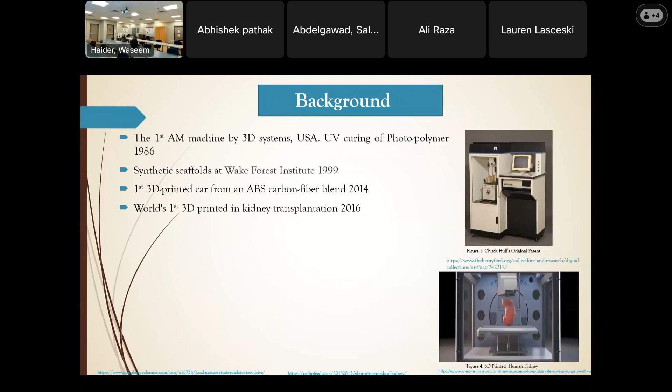But where exactly did it begin? It was actually in 1986 when Chuck Hull was given the patent for the first form of 3D printing, which was stereolithography. You can see the image on the right side. But it wasn't until 1999 that this technique was actually used for any practical purposes, and it was almost in 2014 when it was used for an engineering application where the first 3D printed car was made by blending ABS and carbon fiber by the company called Local Motors.

But what we're interested in is the huge development in 2016 when the first kidney, as I have shown in these two images on the bottom right, was actually 3D printed. Now, when I say 3D printed, 3D printing and additive manufacturing are just like synonyms. So that's what happened in 2016.

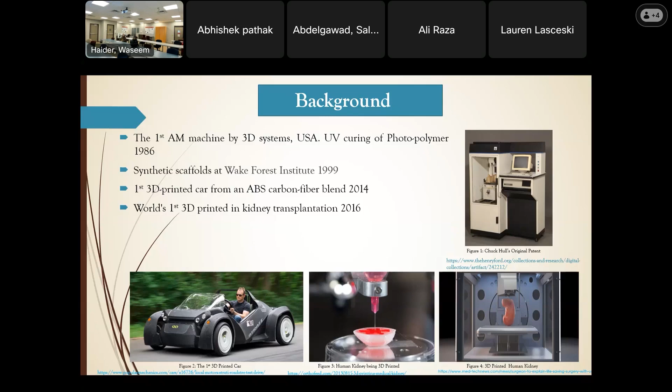And now, if we look into the engineering applications, we find that Bugatti became the first car manufacturer to use 3D printing as the method of manufacturing for the brake calipers for the world record holder car, the Chiron, as I've shown in the picture on the top right. Now, what's interesting about this car is that this brake caliper, these intricate designs and all these channels and sections and hollow areas that we see, all of this was possible by using 3D printing and the dimensional flexibility that we get from it.

And of course, we were using the hollow sections of titanium, as I mentioned here. And all of these things gave rise to unbelievable physical and mechanical properties, all of which were evident in the high-speed runs when they saw that the brake calipers as well as the rotors did not fade or fail, and were up to testing temperatures of 1200 degrees Fahrenheit.

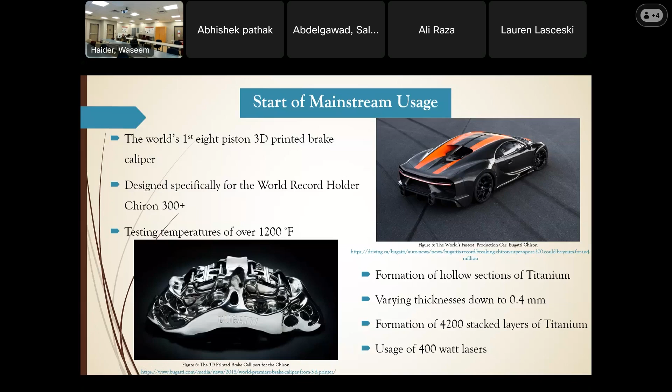These types of things led to the vehicle reaching high speeds of almost 500 kilometers per hour. This car is in the Guinness Book of World Records because of its dependence on the braking power provided by calipers made through 3D printing. So that's another example of how these technologies are affecting the engineering sector.

Some of you might already be aware of this technology, and some of you might be new to it. So let's run swiftly through the idea.

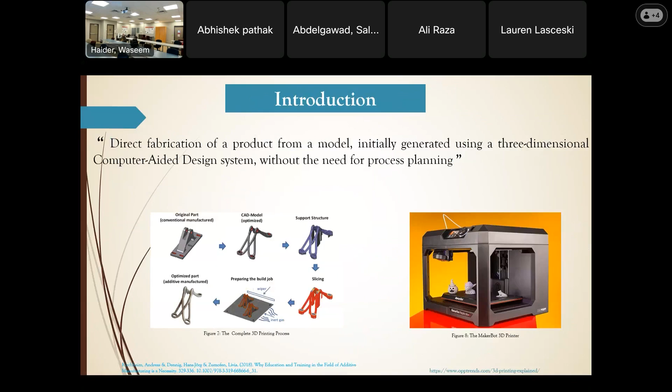Simply put, it's a direct fabrication mechanism in which we make a 3D model, a CAD model, through a computer of whatever part we need to print. That model is then supplied to a computer connected to the actual 3D printer, which has high-speed lasers in it. I'll explain the whole process in the next slides.

To summarize, the high-speed laser starts to melt the uniform layer of powder deposited on the build platform. Once that initial layer is melted and solidified, the laser beam moves slightly overhead and builds the second layer, then the third, then the fourth, all the way up until the final part has been built.

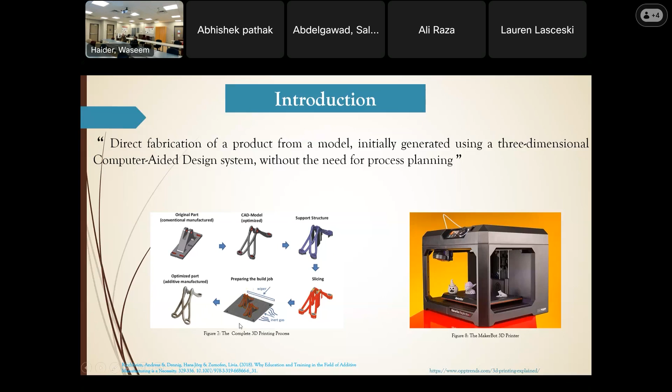The build can be vertical or horizontal, but let's go deeper into the actual process. The first thing we need is a 3D model through a CAD modeling system. There are different types of modeling mechanisms, and two types I want to discuss here, and why we need the latter.

We have the solid model and the polygon model. With a polygon model, we can have walls of zero thickness as well. This type of modeling is very useful if we're looking for gaming graphics or gaming scenarios.

Once we have that - I've given an example of a pair of spectacles here - this is an example of the model that we need. We'll have to go to the previous slide, sir.

Once we're done with that, we need to convert that model into a format readable by the 3D printer itself, and that's when the conversion to STL comes into play.

STL is an abbreviation of stereolithography. Some people also call it standard triangle language. What it does is define the 3D model into a 3D shape with all the intricate details that might be present on the surface, details that may not have been visible in the initial model.

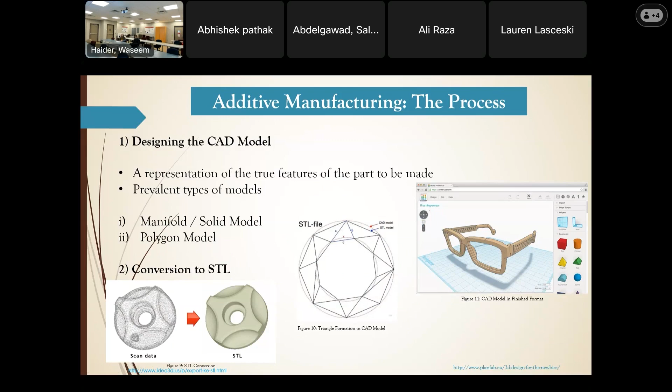The first step is that the build platform is covered with a uniform layer of the powder, covering the whole platform. Then when the laser fires up, it starts to melt that first layer of powder in accordance with the coordinates provided in the model.

Once the first layer has been molten, it starts to solidify, then the hopper containing the laser mechanism moves upwards by a certain dimension, and starts to deposit and melt another round of powder. It deposits the powder, melts the powder, moves upwards - it's a cyclic process, layer by layer, all the way up until the part is finished.

It could be a horizontal build or a vertical build, but most of the time people prefer a vertical build. Once you're done, you just remove the part. If you see this image on the extreme left, you can see these little edges between the notches of this part.

So these are called the supports. These little things are actually responsible for making sure that the part is standing upright onto the build platform. Obviously they're not part of the actual component, so you have to remove them. You see that in both of these next images right here.

Sometimes there's just standard support, sometimes they're dissolvable, so you just put them in a solution and they dissolve right away. Otherwise, you have to use mechanical methods like grinding and polishing, and you're good to go. That's the beauty of this process, because once you do 3D printing or additive manufacturing, you face little to no post-processing. Don't get me wrong, there is still some type of post-processing associated with the mechanism, but not as extensive as we have with casting, forging, welding, all these things.

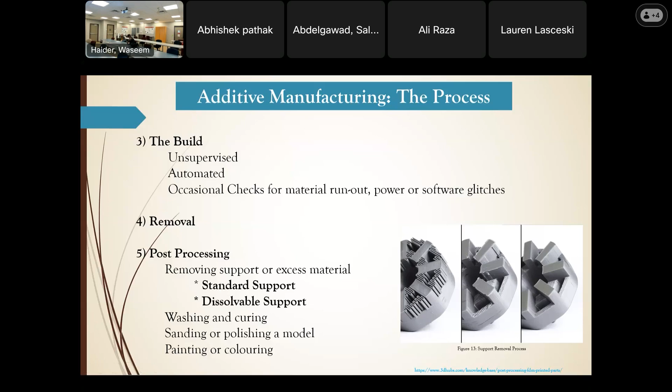This is where we gain an edge over other conventional techniques. We're talking about the benefits, right? So let's talk a little bit more about them. I've already talked about the shape tolerances, the dimensional flexibility, and the way we can just customize whatever we need.

Just imagine the type of intricate details you have on that brake caliper, you are literally amazed by this technology. It just goes to show how much flexibility we have and how far we've come from conventional techniques like casting or forging or all these other techniques. But we have all these customization techniques nowadays.

And of course, once we do that, we have little to no material loss because we're just making a simplified model and we have no other excessive parts associated with that.

Like, for example, let me talk about casting. I have a little bit of experience, like a year and a half in the casting industry back home. I promise you, every single day I used to see parts which had to be grinded just because they had excess metal coming out of the molds.

They had metal splatters all over the place. They had shrinkage, they had porosity. So all of these things, what are they? It's just material loss, right?

But this is something that you will never see when you're using additive manufacturing. Mind you, there are some defects. I'm not just going to talk about all is well and you're in a utopia. You're not. Obviously, there are some defects associated with everything. And yes, there are defects associated with additive manufacturing as well, but now is not the time to talk about it.

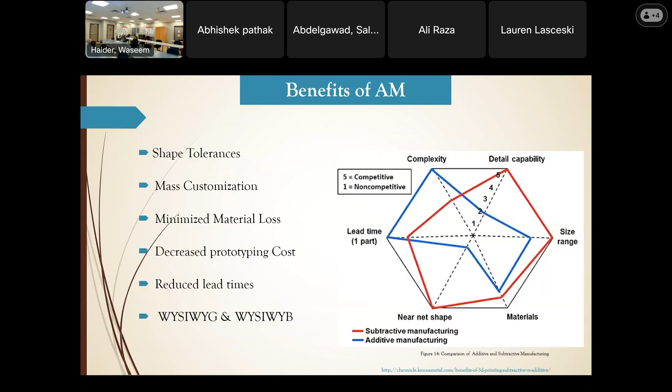So enough of 3D printing, we're just going to move slowly into the second part, and that is machine learning. Now, this is a hot topic for the past couple of years, so I honestly don't think I need to explain this to anybody, but let's just look into how people have been explaining it in the past.

The simplest words are people talk about automating the automation so that the computers just do the work by themselves. And believe it or not, this is something we have been doing pretty much all our lives.

I'll give you one example. You just feel like listening to some music, so you go to YouTube and listen to, let's say, some trance music. You search for a track and listen to it, then close the whole thing and it goes away. The next time you open YouTube, what do you see? There's a new trance track in your suggested tracks.

So what is it? Little did we know that this was just another form of machine learning we never paid attention to. This is just one example. And of course, we have the machine learning we see when we type anything on Google, and before we even finish the words, they're actually finished for us. This is also a type of machine learning.

But for people who have little to no experience with machine learning, let me break it down. It's more like gardening, where you are the actual gardener. What you do is plant the seeds, which in this case are algorithms. Once you've planted the seeds, you supply the data to the algorithms, which we can talk of like nutrients or fertilizers. So you supply the data to the algorithms, and in return you get plants, which in this case would be the program itself.

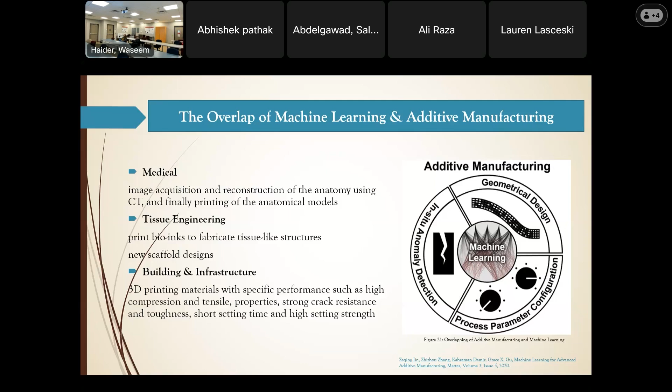Now, there are two different types of training mechanisms: the offline model and the online model. So what these researchers did is they used offline training of the model. Now, the thing with offline training is that you supply the model with a certain quantity of data, and then you do not supply another batch until you have an actual result or output. This is different from the online model, in which you continuously supply data as you go along making predictions.

But they used offline training, and what they did is use previous data from all these 3D printers working separately, and then they all submitted or used that data as an input for that machine learning model, and all of that data was used for the main server. So what they found out is that when all these 3D printers are connected to a machine learning model, and they're taking all the experience from that model, they're able to self-organize.